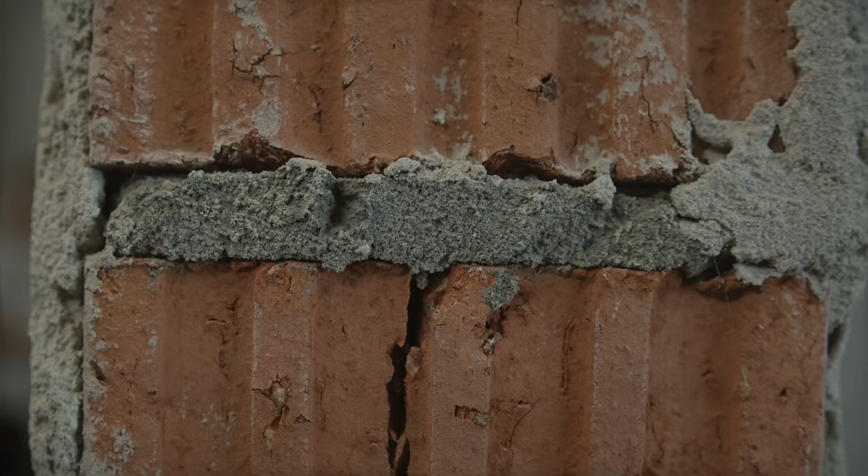Now, Julie isn't a real person, but this is a real story, and the 2021 collapse of the Champlain Towers South condo in Florida took the lives of 98 people, many of them within seconds in their sleep. So what happened? Well, the concrete destroyed itself. That's the short answer. But when we dig deeper into this case, it gets even more interesting.

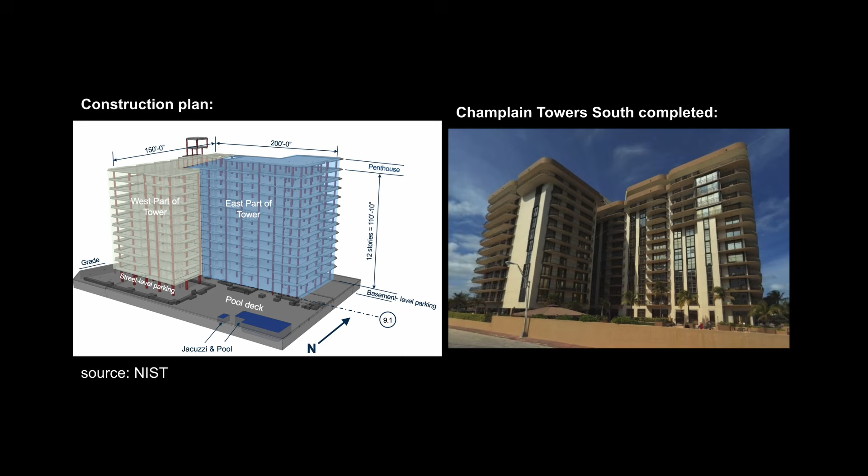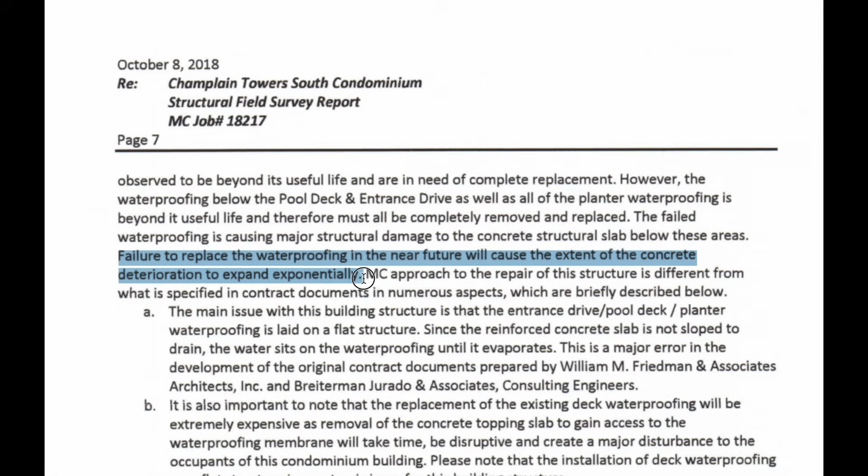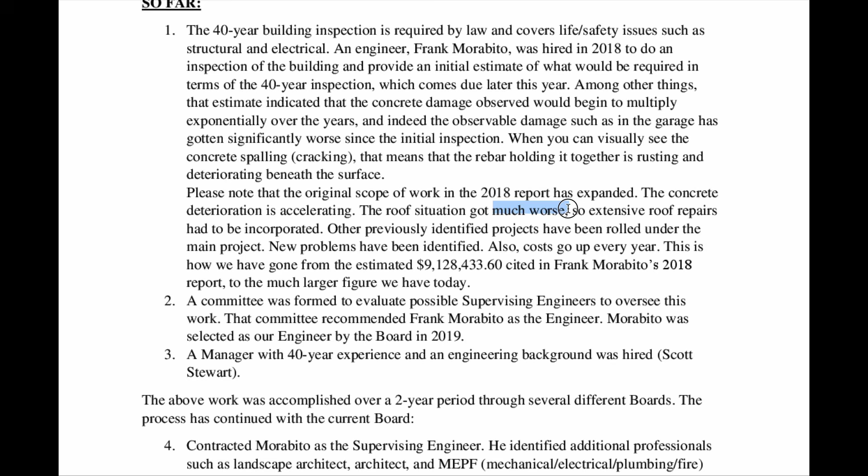Construction of Champlain Towers South was completed in 1981, and by the time it collapsed, it was just 40 years old. But engineers had flagged serious structural damage back in 2018. A report warned that failure to fix the waterproofing will cause the extent of concrete deterioration to expand exponentially. By April 2021, 2 months before the collapse, the damage was noted as much worse. A $15 million repair program had been approved.

Yet, due to incompetence, or maybe they had other priorities, who knows, no one thought to actually initiate the repair work. And so, without repair, the concrete had been quietly destroying itself for years. Nobody could see it from the outside. But on that Thursday night, everything came crashing down.

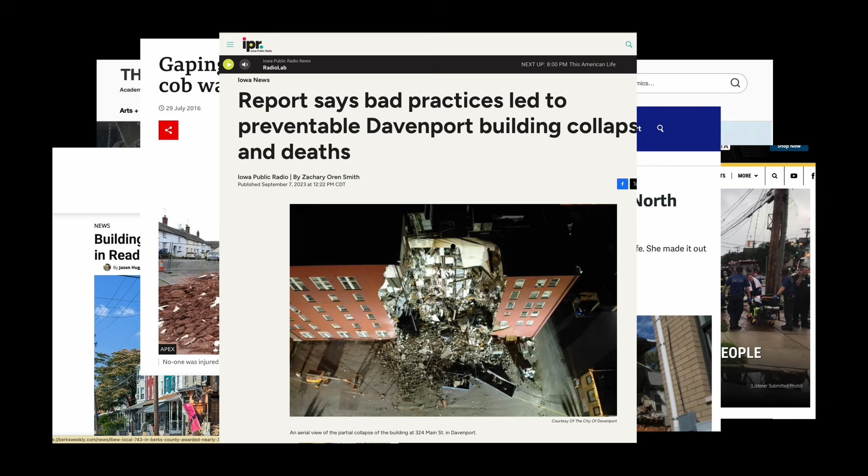This case is one of many, and I'm going to explain to you why the concrete in America is a national problem. But before I dive into this further, I'm hungry for some pasta. Let's take a quick pit stop to Rome, Italy.

Damn, how old is this thing anyways? 1900 years? Okay, I don't know about you guys, but I'm confused. How the heck did the Romans manage to build something so massive that lasts nearly 2 millennia, yet modern day us can't even make sure a residential condo stays standing for 50 years? Okay, so I did some research. Let's take a closer look at the Pantheon.

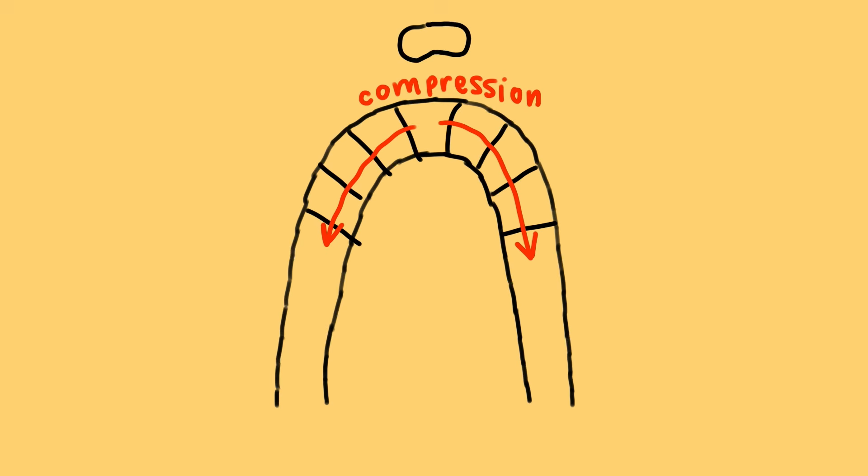The Romans knew that concrete is weak under tension, the kind of stress you get when you bend something or you pull it apart. So they solved this not by changing the material, but by designing around the limitation. The Pantheon's dome works because of its shape. The curve converts the weight into compression all the way down. No tension, no problem. Don't worry if you don't really understand this, I don't either, but all you need to really know is that what the Romans did, it worked. They created the Pantheon and a bunch of other structures that have lasted for multiple millennia.

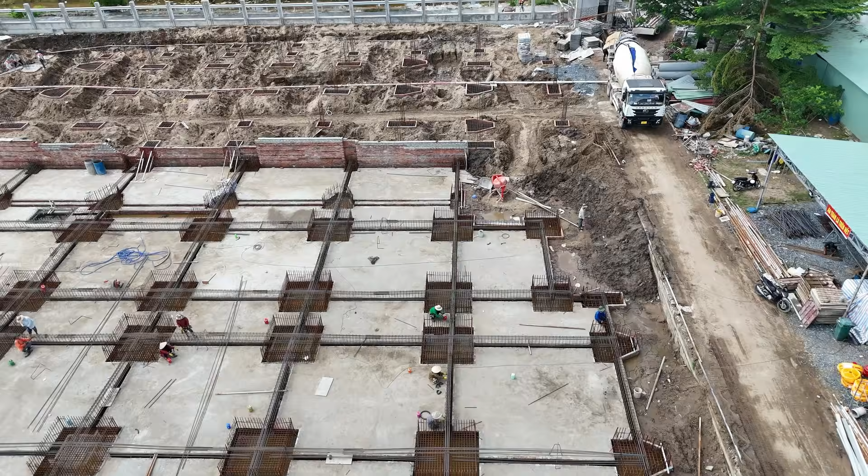So the real question is, why did we change it? The Industrial Revolution. All of a sudden, engineers needed flat slabs, horizontal beams, skyscrapers, structures that arches or curves can't really build on their own. So in the 1860s, a French gardener named Joseph Monier, who was just tired of his concrete flower pots cracking, came up with a pretty revolutionary idea. Put steel rebar inside the concrete.

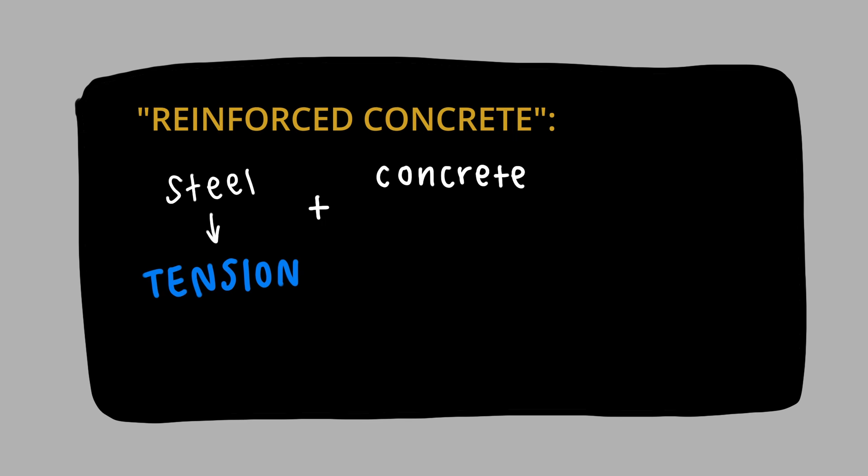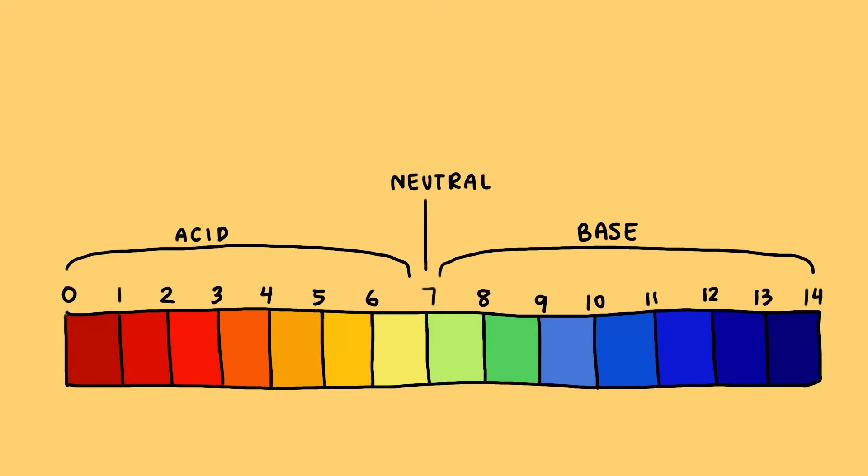Steel handles tension, concrete handles compression. Together, they are the perfect team, right? Well, it worked. It built the modern world as we know it today. But eventually, scientists discovered a major problem with Monier's solution. Fresh concrete is extremely alkaline, and that alkalinity forms a thin protective layer directly around the rebar. As long as that layer exists, the steel doesn't rust.

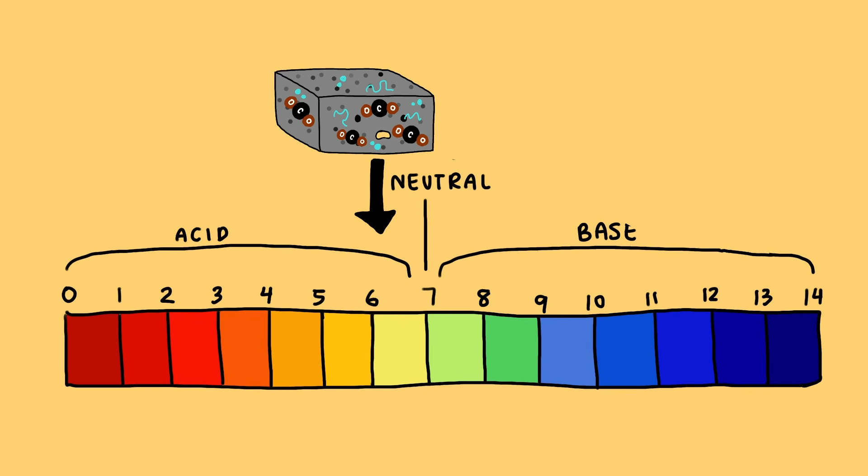But concrete is full of tiny pores, and over time, carbon dioxide from the air slowly seeps in. It reacts with that concrete and gradually lowers the pH. Once the pH drops far enough, that protective layer is gone. Now the steel is exposed. Moisture gets in, oxygen gets in, the steel starts to rust. And the rust expands, up to 4 times the original size of the steel, pushing outward against the surrounding concrete until it cracks, essentially destroying the structure from the inside out.

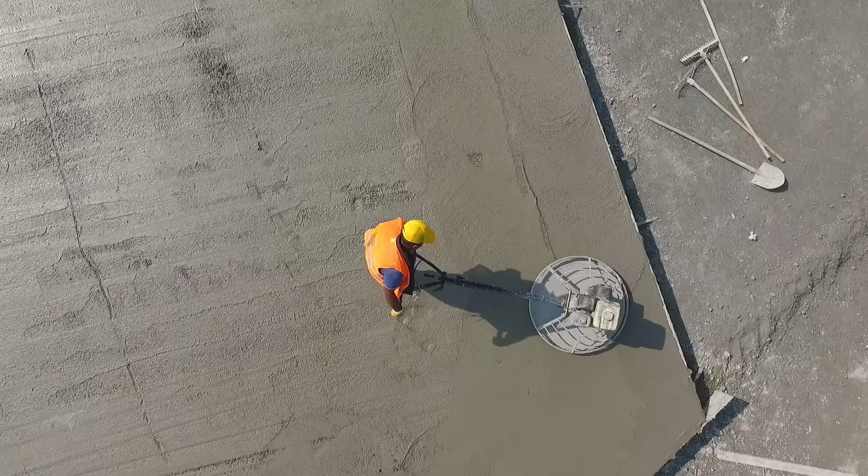The worst part, you can't see any of this from the outside. The concrete looks completely normal. And that's why the engineers at Champlain Towers South didn't think to really act on the problem. They pushed off their $15 million repair program and let the collapse happen.

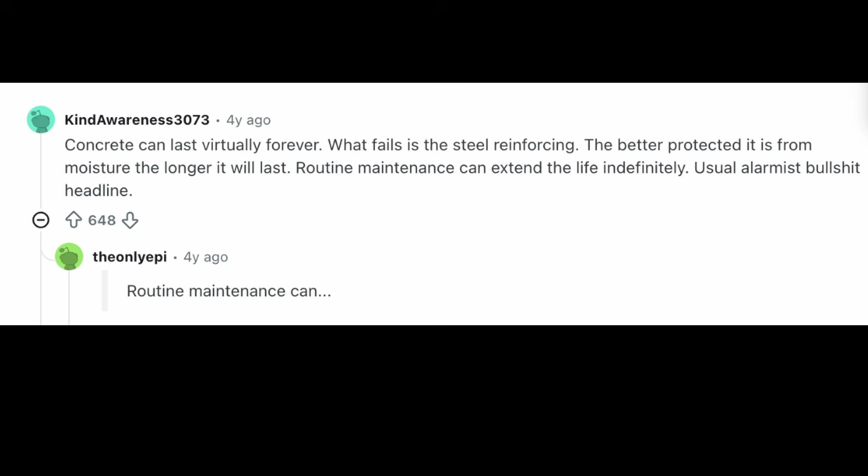Reddit user KindAwareness3073 says, concrete can last virtually forever. What fails is the steel reinforcing. The better protected it is from moisture, the longer it will last. Routine maintenance can extend the life indefinitely. Reddit user The Only Epi: routine maintenance can, well, we're fucked. And I think that sums up the problem pretty well.

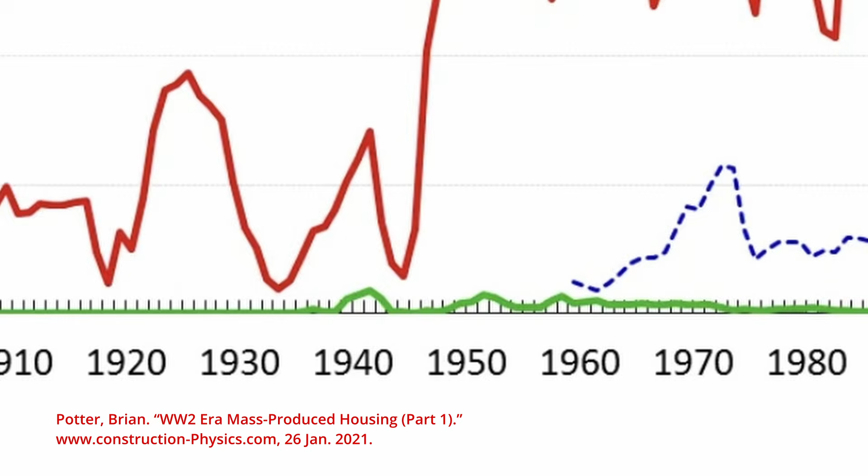Okay, I don't want to fearmonger. No, your house is not going to collapse tomorrow. Knock on wood. But I do want to stress that the timeline is shorter than you would expect. After World War II, the US had a huge construction boom. 40 million housing units were built in the 30 years between 1945 to 1975. And private housing starts rose by a factor of 20 to nearly 1.7 million in 1950.

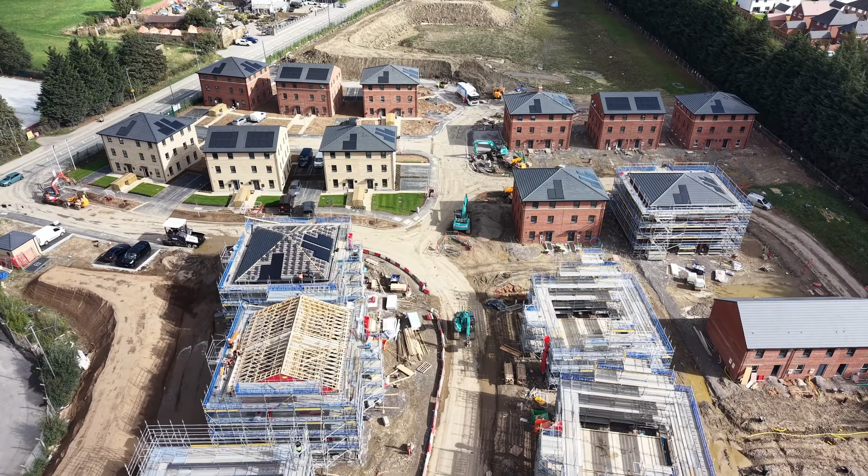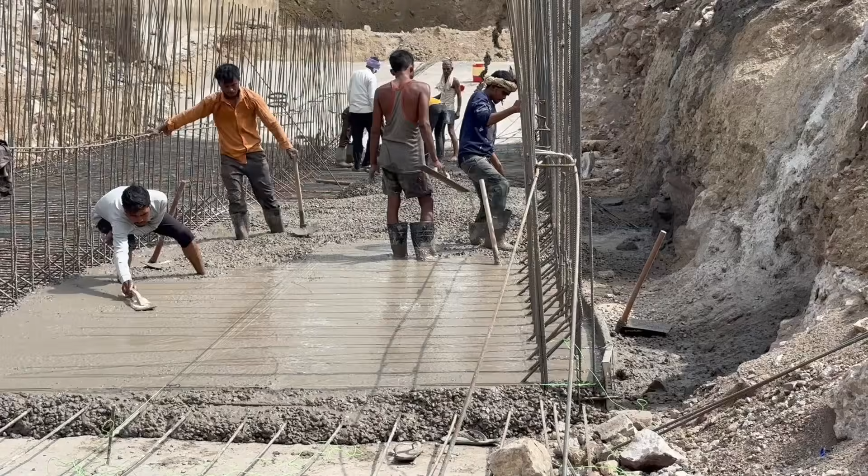The concrete foundations under virtually all of these houses, poured starting in the late 1940s, have now been in the ground for 70 to 80 years. And for most multi-story concrete buildings, like Champlain Towers South, the entire structure is reinforced concrete. Standard reinforced concrete structures are designed to last 50 to 100 years. Let me repeat, 50 to 100 years. The ones built in the 1950s and 60s are right in that window now. Some have already exceeded it.

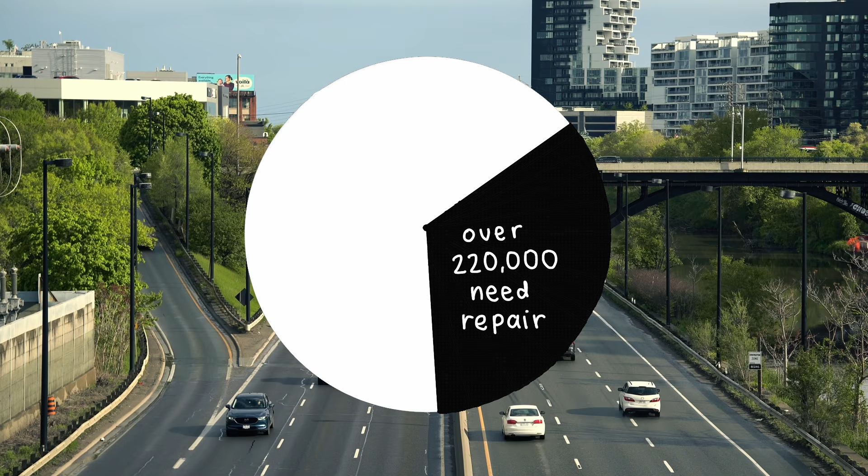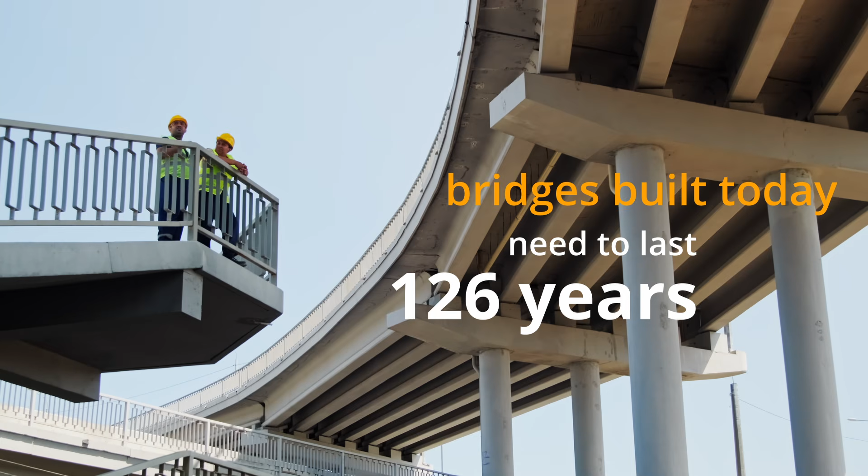And it's not just buildings, it's bridges too. According to the 2025 Infrastructure Report Card published by the American Society of Civil Engineers, 45% of US bridges have already exceeded their planned 50-year design lives. A third of the entire national bridge inventory needs repair or replacement right now. And at the current rate of replacement, bridges being built today would need to last 126 years to keep up. That math doesn't work. The Fern Hollow Bridge in Pittsburgh collapsed in 2022. It opened in 1973. That's exactly 50 years, right on schedule.

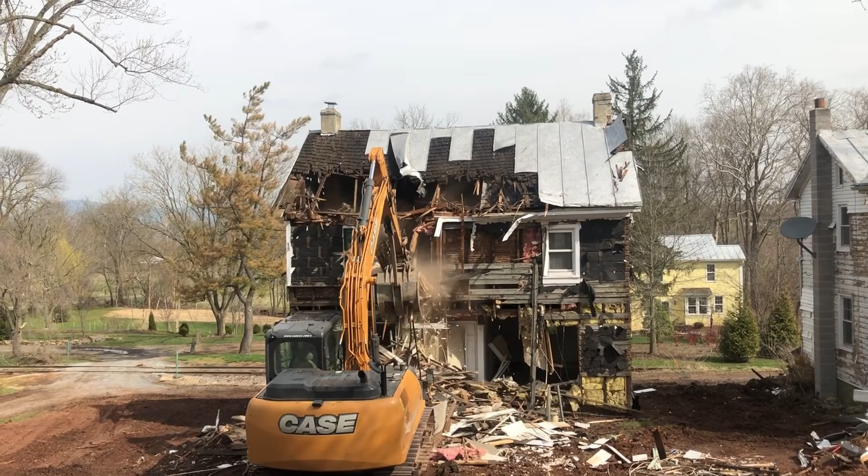So we're not talking about a future problem, we're talking about a problem that is actively unfolding right now across the country, in the concrete under your building, in the bridges on your commute, mostly invisible until it isn't. If engineers have known about this problem for years, what is America actually doing about it?

Well, in 2021, President Joe Biden signed the Infrastructure Investment and Jobs Act, also known as the IIJA. It's a $1.2 trillion infrastructure bill and the largest federal investment into American infrastructure in decades. Due to the bill, America's infrastructure grade improved from a C- in 2021 to a C in 2025. I mean, C's get degrees, right? But then something awkward happened. We realized just how deep this problem goes.

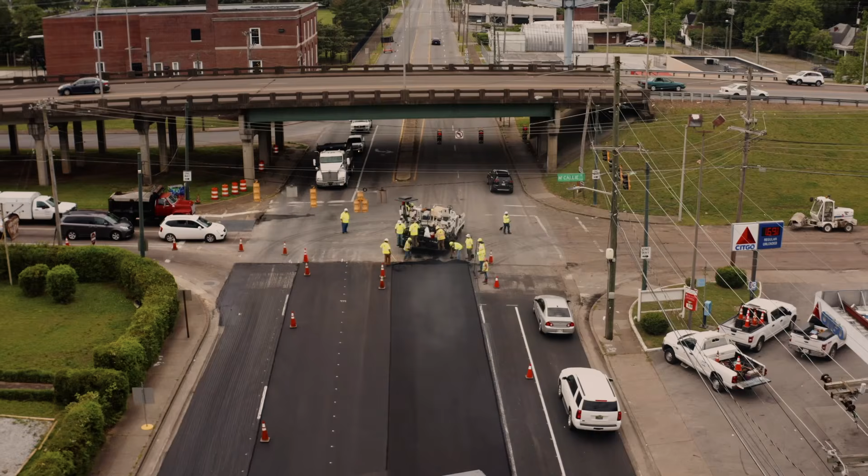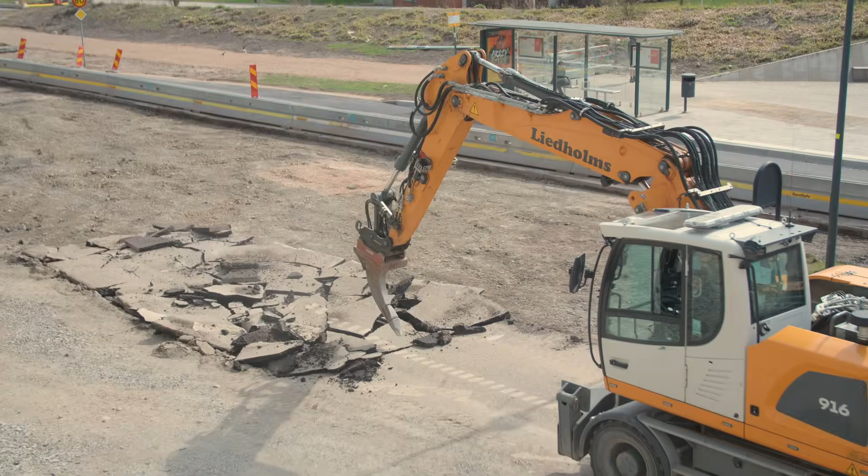Because even with the IIJA, the United States still falls roughly $3.7 trillion short of the infrastructure investment needed to bring the country into a proper state of repair. By February 2026, nearly 5 years after the bill was signed, only around 40% of the entire planned budget had actually been spent. That means that while the concrete problem is actively accelerating in real time, a massive chunk of the repair money was still sitting in paperwork, approvals, frozen grants, delayed contracts, and political gridlock.

And now we come to a critical realization. The IIJA expires in September 2026. By the time you're watching this video, we have 4 months to wrap things up. 4 months to outlay over half of the original budget. So what is Congress doing as of May 2026? Well, they're trying again. On May 18th, lawmakers introduced a new proposal called the Build America 250 Act. The bill is intended to replace the IIJA once it officially expires in September 2026.

The good news about this bill is that it strengthens funding for bridge repair and maintenance. For the first time in over a decade, the federal bridge money will be distributed based directly on the actual condition of bridges in each state, which sounds obvious but somehow wasn't the case until now.

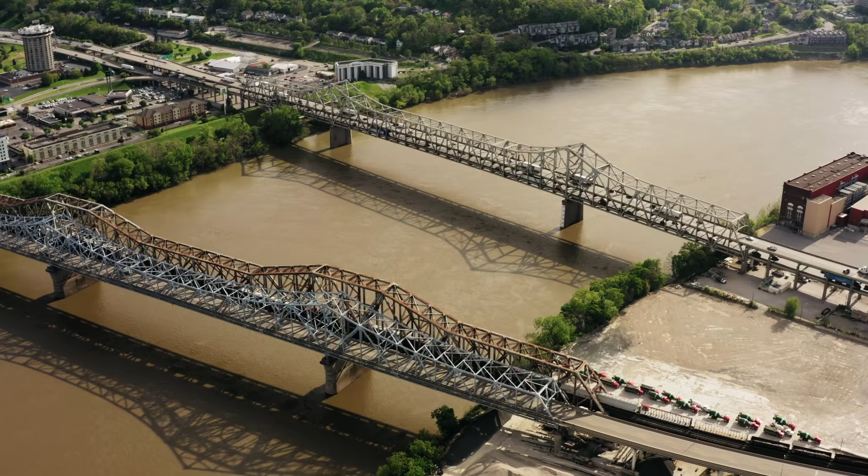The bill also closes a loophole that previously allowed states to redirect bridge repair money towards unrelated projects. All of this is genuine progress towards making sure that the bridges that need repair will actually get repaired in time. But unfortunately, aside from the progress in bridge maintenance, there is a huge problem with Build America 250.

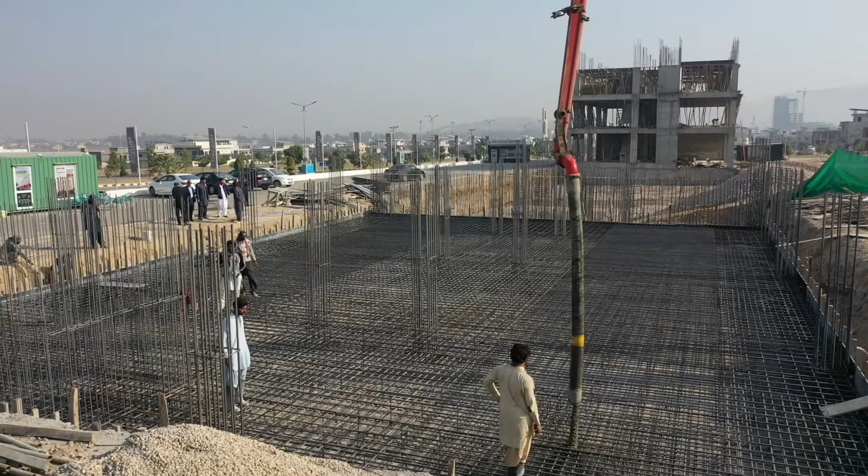This bill repeals funding for programs in climate resilience, flood mitigation, carbon reduction, active transportation, and more. Programs that were meant to slow the environmental conditions accelerating concrete decay in the first place. Because climate change doesn't just affect weather, it affects the chemistry. Higher temperatures, flooding, humidity, saltwater intrusion, and rising carbon dioxide levels all accelerate the deterioration of reinforced concrete.

So, while this bill increases damage control, it weakens prevention. And if concrete deteriorates faster than we can repair it, then the United States may never actually catch up with this problem.

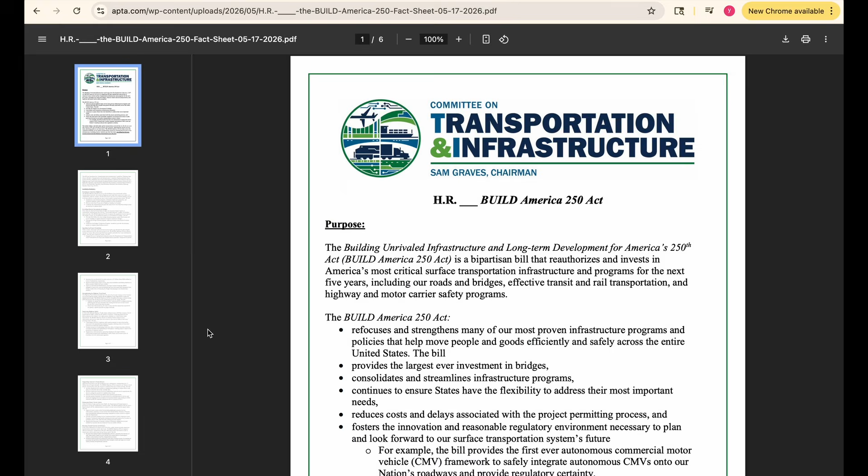Now, while I was researching the IIJA and Build America 250 bills, I was very adamantly trying to look for anything that implicates funding for housing and building repair. But after failing to find a single keyword in these thousands of pages, I realized that there is an even bigger issue at hand that no one is talking about.

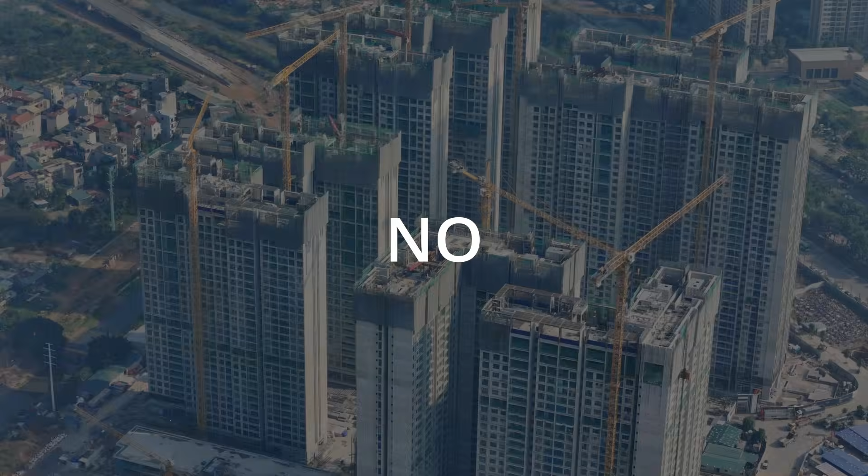Federal infrastructure bills focus almost entirely on transportation: bridges, highways, roads, rail, transit, etc. But reinforced concrete is everywhere. It's in office buildings, parking garages, schools, apartments, condos. And unlike bridges, most of these structures don't receive federal funding for routine maintenance.

In March 2026, reports showed that deferred maintenance across federal buildings had already surpassed $50 billion, with nearly half of government buildings now considered to be in poor condition. Such poor condition that the cost to demolish or repair them outweighs any potential reuse.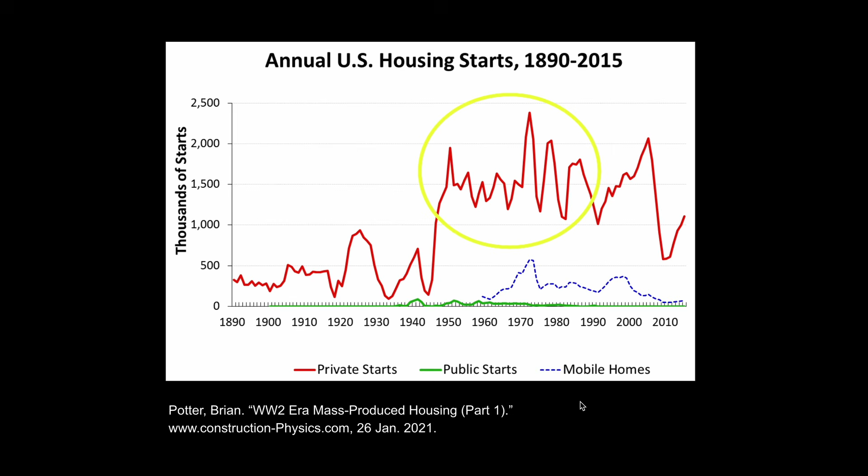And private housing may be even more concerning. Millions of apartment buildings and the condos built during America's post-war construction boom are now reaching the age where reinforced concrete deterioration starts becoming a serious maintenance issue. And maintenance is expensive. Very expensive. Nearly 2 in 3 homeowners have delayed or ignored a maintenance task in the past 5 years.

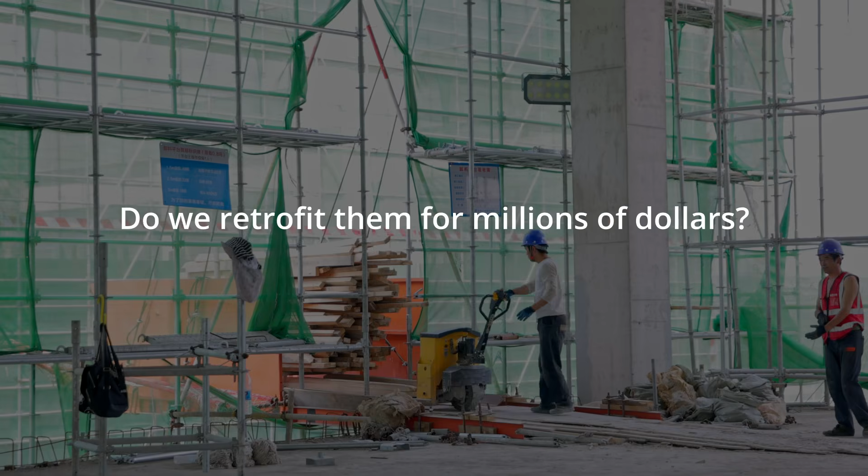Which raises a really uncomfortable question for us. What happens when entire buildings reach the end of their intended lifespan? Do we retrofit them for millions of dollars? Do we demolish them? Rebuild them? Who pays for that? The owners? The city? Taxpayers? Insurance companies? These questions have no obvious answer, and that's how something as foundational and ubiquitous as concrete becomes a heated political issue in the middle of our partisan country.

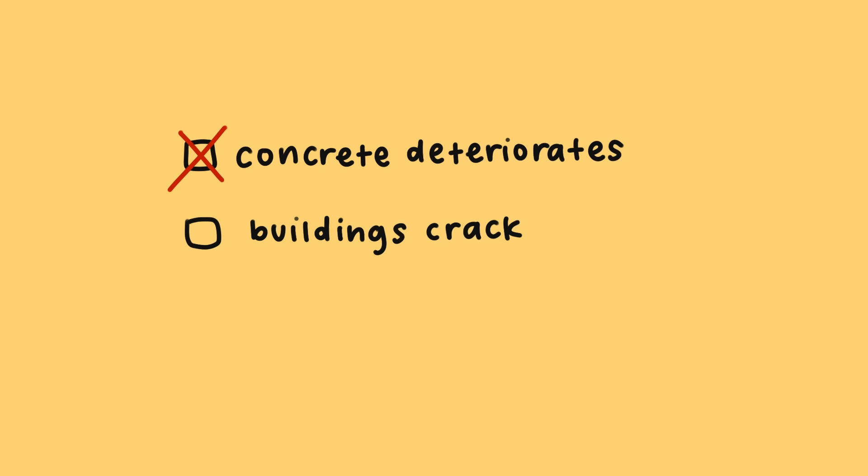As we reach the end of this discussion, I want to reiterate that the main message of this video is not that concrete deteriorates or that buildings crack. This isn't revolutionary stuff. Engineers have known all of this for decades. The question I'm proposing, and frankly don't have an answer to, is what happens when a society built on maintenance slowly stops maintaining itself? Because here's the secret.

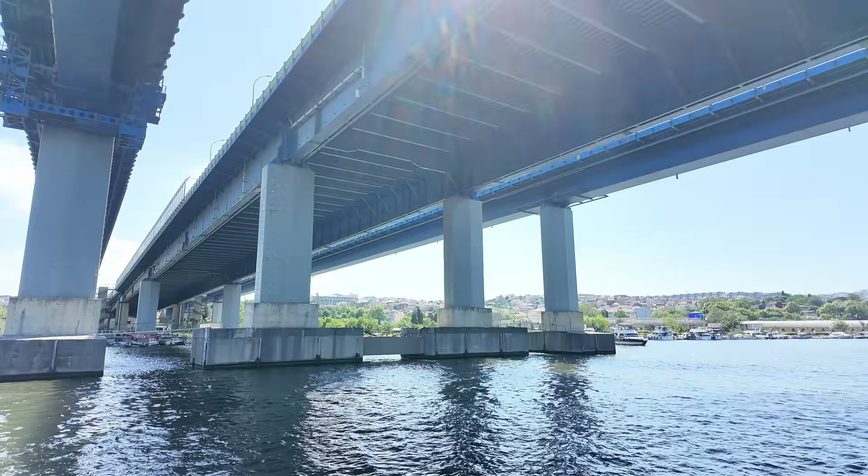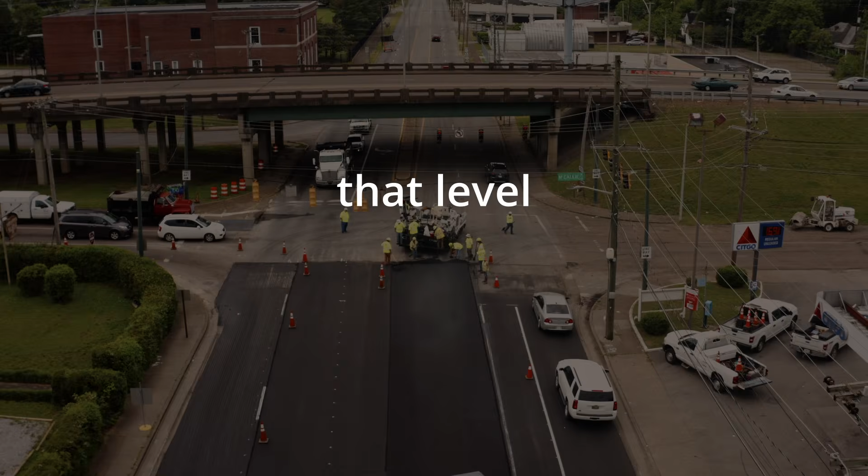Reinforced concrete can last an incredibly long time if people are willing to continuously inspect it, repair it, and invest in it before the damage becomes catastrophic. But that level of maintenance is expensive, it's inconvenient, and politically, it's hard to sell in a system that prioritizes short-term political wins over long-term maintenance.

So that's how, year after year, the damage gets deferred, the inspections get delayed, the repairs get postponed, all while the concrete erosion keeps accelerating.

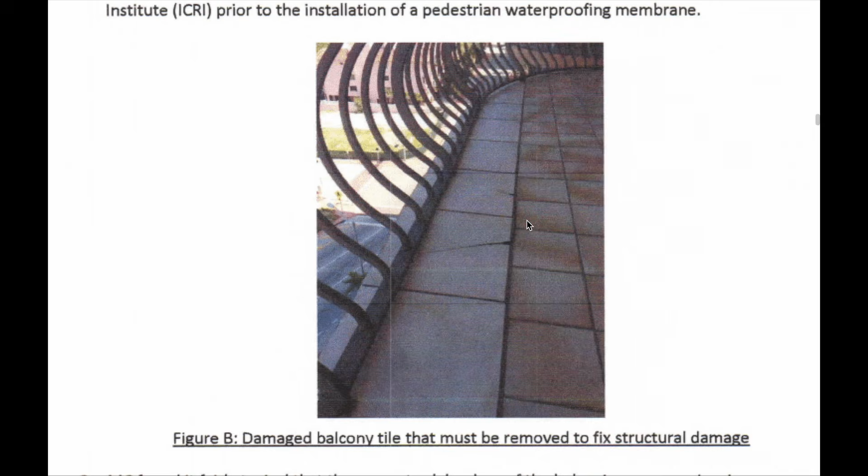Champlain Towers South was only 40 years old when it collapsed. The engineers had already identified major structural deterioration years before the collapse. The repair program had already been approved. The work just hadn't started yet. That's not a concrete problem, that's an us problem.